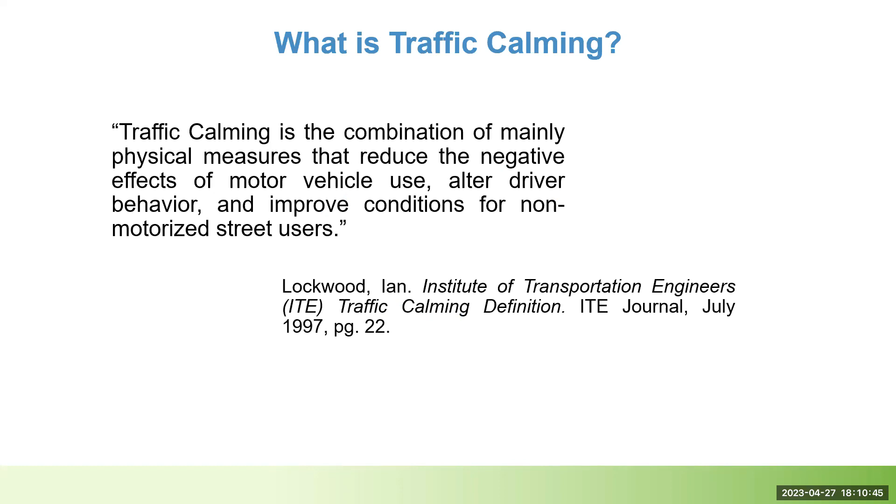The traffic calming program in Ann Arbor is designed to provide residents with a formal process for engaging with the city in a partnership to perform a technical analysis of traffic concerns on local streets and explore potential solutions. It's a 5-step program, and we'll briefly describe each step, but there's a guidebook available online with more detail if you'd like to review anything after this meeting.

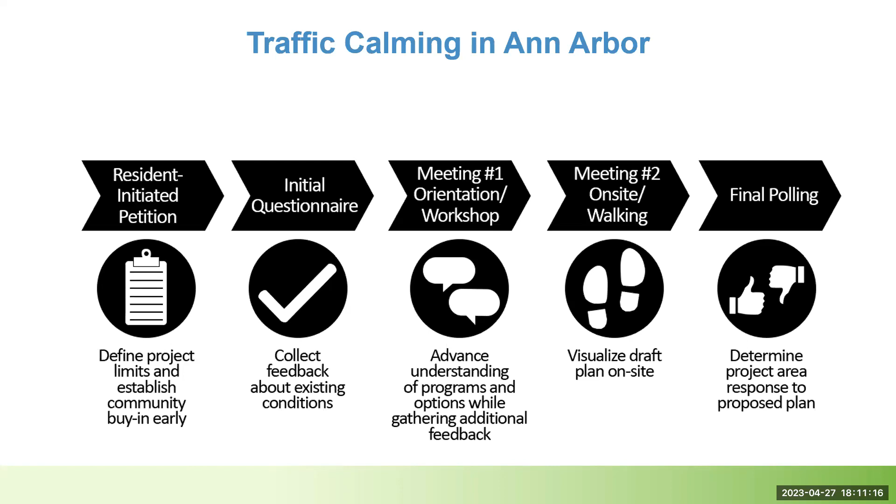The Manchester Road project started with one of your neighbors acting as a petitioner who submitted a request to the traffic calming program for Manchester Road between Buckingham Road and Needham Road. The petitioner gathered signatures from residents who lived in this area.

The requirement for the traffic calming program to accept the request is that at least 50% of the defined project area must support the project, and a preliminary technical study must result in at least 10 points. This project collected signatures from 50% of the addresses, and the preliminary study resulted in 29 points. A breakdown of those points is available on the project website.

At step 2, Wade Trim sent out mailers with an initial questionnaire to all project area residents to gather feedback on specific concerns you may have and what experiences you may have previously had with traffic calming. A detailed summary of the questionnaire results is available on the project website, but the requirement to continue on to step 3 is at least 50% of those who participate in the questionnaire must support the project moving forward. Of the questionnaire responses we received, 73% were in favor.

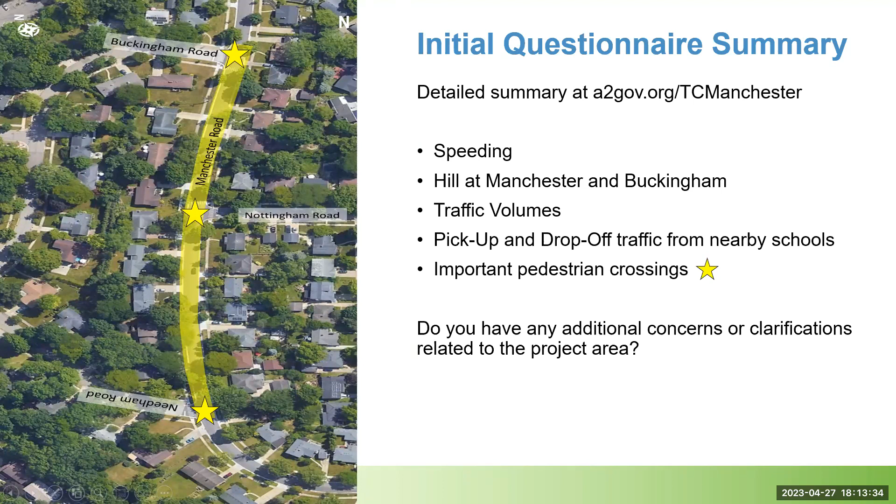Please use the Q&A function or raise your hand if there are any concerns or if there's context we have missed.

Step 3 is where we are today, and where most of our focus will be for the rest of the meeting. Before we present the starter idea, we'll go through an overview of the device toolbox that is described in the program's guidebook.

Before that, we'd like to do a quick poll to see how familiar people may be with the guidebook. The question is: have you reviewed the traffic calming guidebook, specifically the device toolbox found on pages 9 through 12? Yes, I'm all set; or yes, but I would still appreciate a refresher; or no.

Because of the structure of this program, the designs we propose are limited to the device toolbox and guidebook. This means if it's not in the toolbox, it's not an option for this project. Some commonly suggested solutions that are not included in this program are stop signs, cul-de-sac or street closures, police enforcement, new sidewalk installations, and removal of existing devices. Additional information and resources can be found in the guidebook or on the A2Gov website.

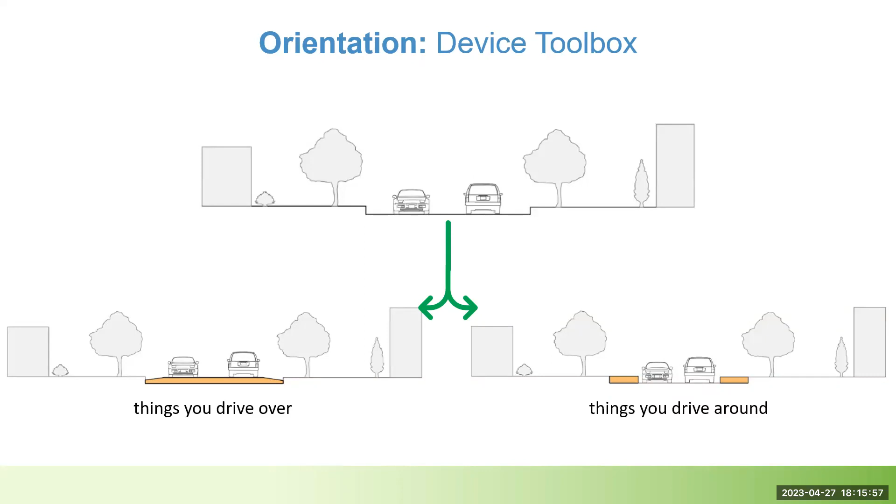Things you drive over are devices that slow traffic by creating discomfort if traveled over at a speed exceeding 25 miles an hour. The device toolbox presents 4 devices that fall under this category: speed humps, speed tables, raised crosswalks, and raised intersections.

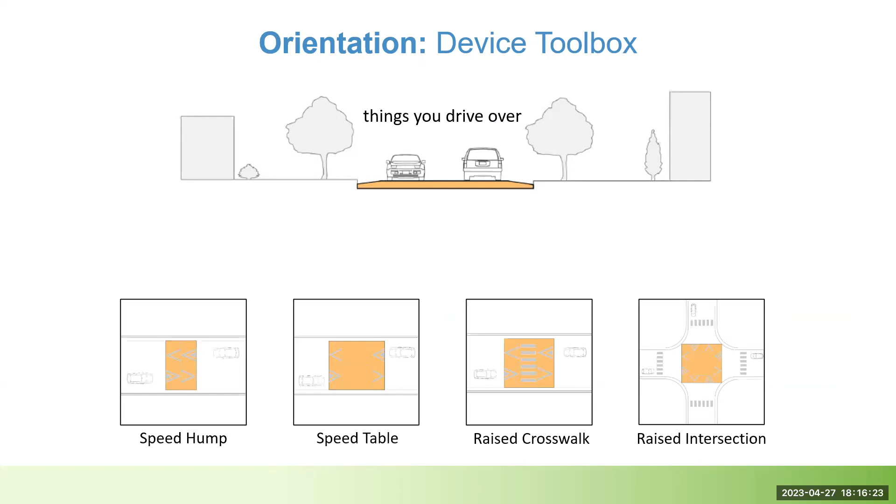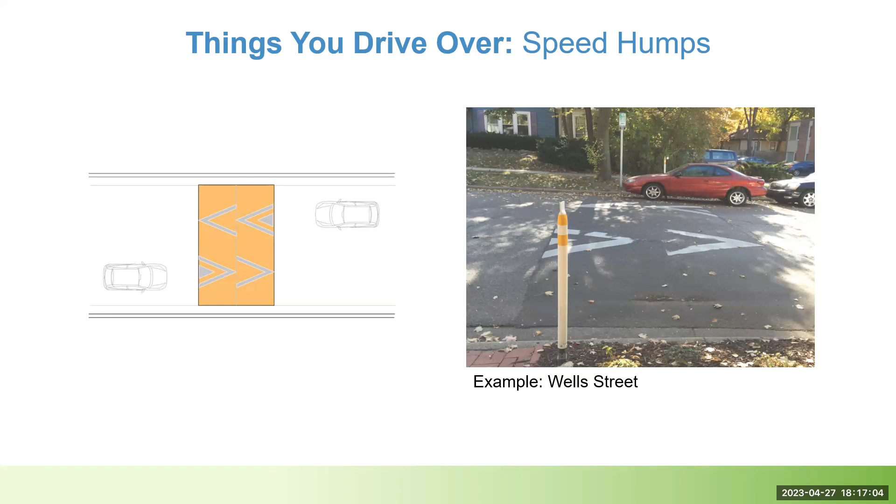A typical speed hump diagram is on the left, with an example from Wells Street shown on the right. Speed humps are typically 12 feet long, 3 inches high, have a parabolic shape, and extend the full width of the street except for the gutter. Studies have found benefits of speed hump treatments may include speed reductions, traffic volume reductions, as well as crash reductions. The height is designed for ease of bike usage and bike safety. If previously permitted, vehicles can park on speed humps, and trash cans can be placed on speed humps if necessary.

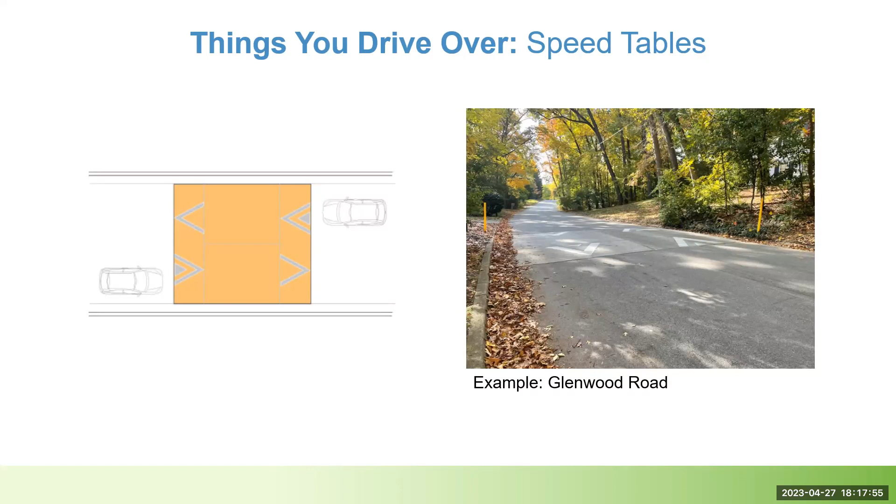This is a speed table. You can see a fully constructed example on Glenwood Road near Washtenaw Avenue. Speed tables are raised devices that extend the full width of the street, except for the gutter. They're typically 22 feet long with tapered edges, a flat 10-foot center platform, and are 3 inches high. Studies have found benefits of speed table treatments may include traffic volume reductions as well as crash reductions. Other notes regarding speed tables: speed reduction is less than the speed hump, and platform width could be customized. The height is designed for ease of bike usage and bike safety. If previously permitted, vehicles can park on speed tables, and trash cans can be placed on speed tables if necessary.

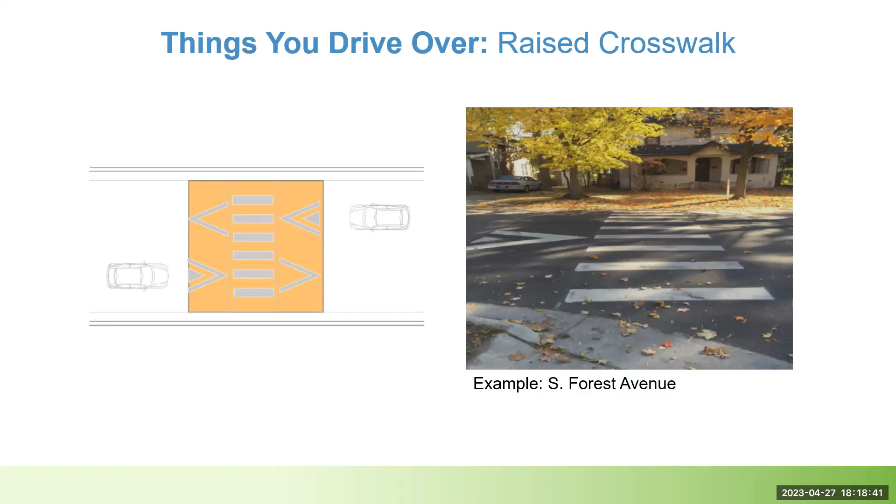This is a raised crosswalk, shown here on Forest Avenue near Woodlawn Avenue. Raised crosswalks are raised devices that extend the full width of the street except for the gutter. They're typically 18 feet long with tapered edges, a flat 6-foot center platform marked with crosswalk striping, and are 3 inches high. Studies of streets with raised crosswalk treatments have shown speed reductions, traffic volume reductions, and crash reductions. They also increase pedestrian visibility, installation must be compliant with ADA, and parking on a crosswalk is illegal, raised or not.

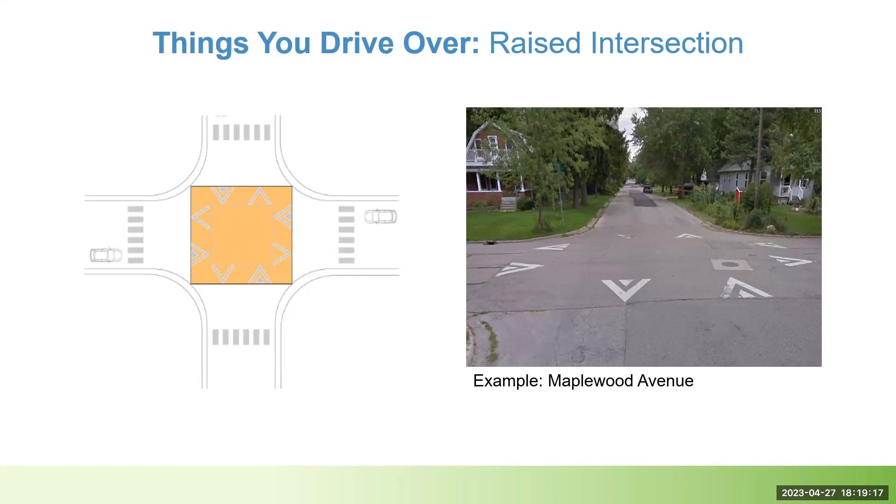And this is a raised intersection, shown here at Maplewood Avenue and Norwood Street. At a raised intersection, each leg of the intersection is ramped to raise the entire intersection 3 inches high. Pedestrian crosswalks may also be marked and raised to the same elevation. Raised intersections are shown to reduce vehicle speed and increase pedestrian visibility. They must be compliant with ADA, and they are designed for bike safety and to have minimal impact to emergency vehicle response time.

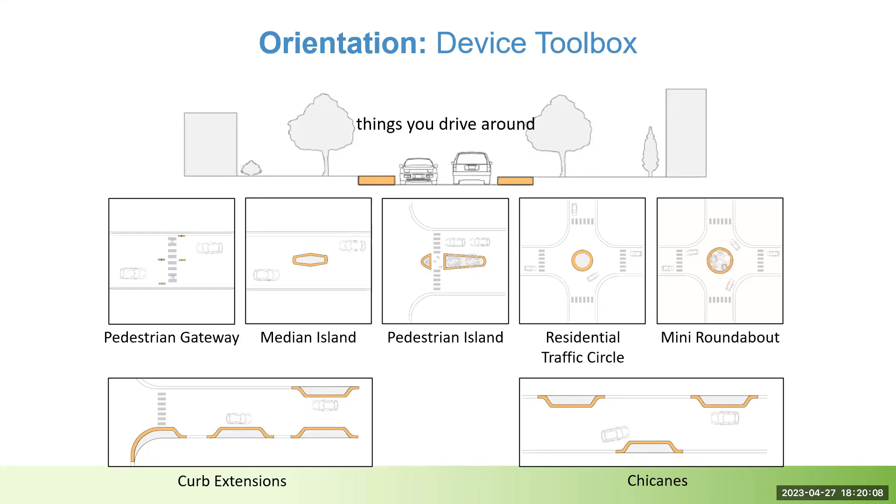The next few slides will describe each of these devices except for the devices marked in red. These devices have been omitted from this project due to street width requirements set by the fire department and conflict with existing traffic controls.

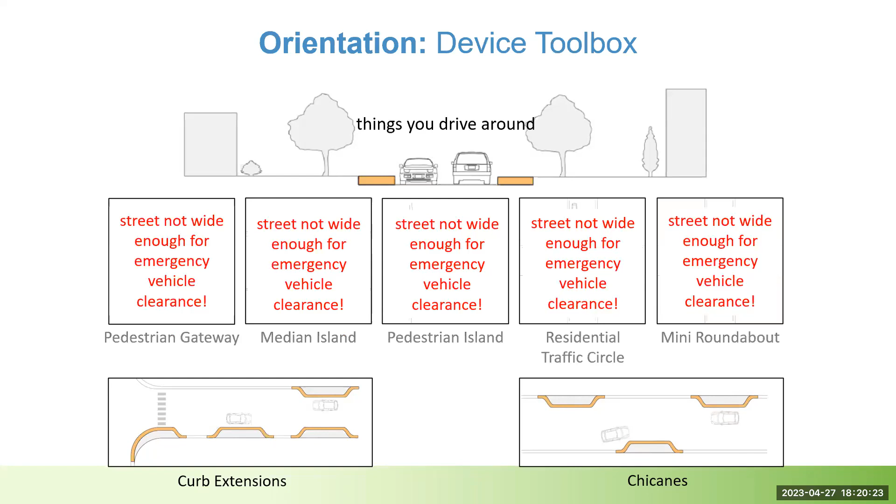2-lane chokers may result in speed reduction and have shown to produce a minor reduction in traffic volume. 1-lane chokers may reduce speed, may result in reduction in traffic volumes, and rely on regulatory signs and driver courtesy. Devices applied to intersection and mid-block locations can shorten pedestrian crossing distance, improve pedestrian visibility, and eliminate illegal parking.

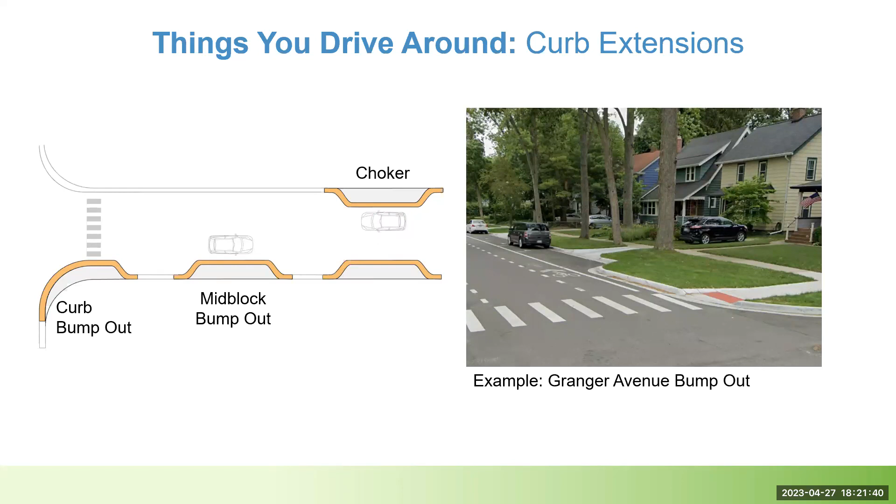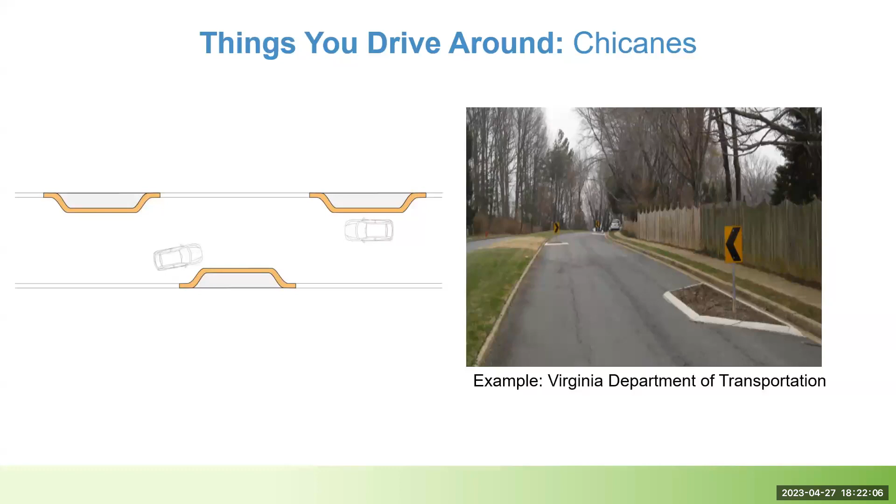Other devices include neighborhood gateway treatments. These are a physical landmark that indicates a change from a higher speed arterial road to a lower speed residential or commercial district. Neighborhood gateway treatments can increase awareness for residential speeds and may require additional right-of-way. In addition, the neighborhood or adjacent property owner would bear landscaping, installation, and maintenance costs.

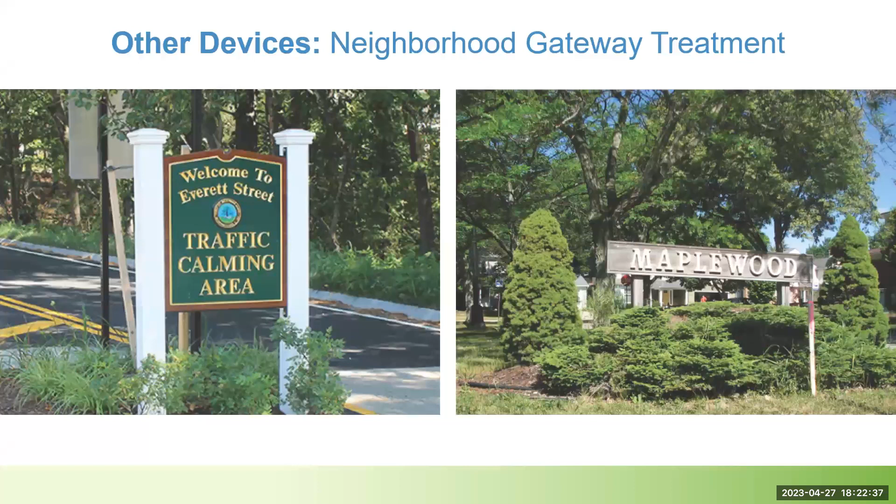Is this a recorded presentation or a meeting? Will the recording be posted? Because the link just showed up on the site 20 minutes ago. Yes, this meeting is being recorded and will be available.

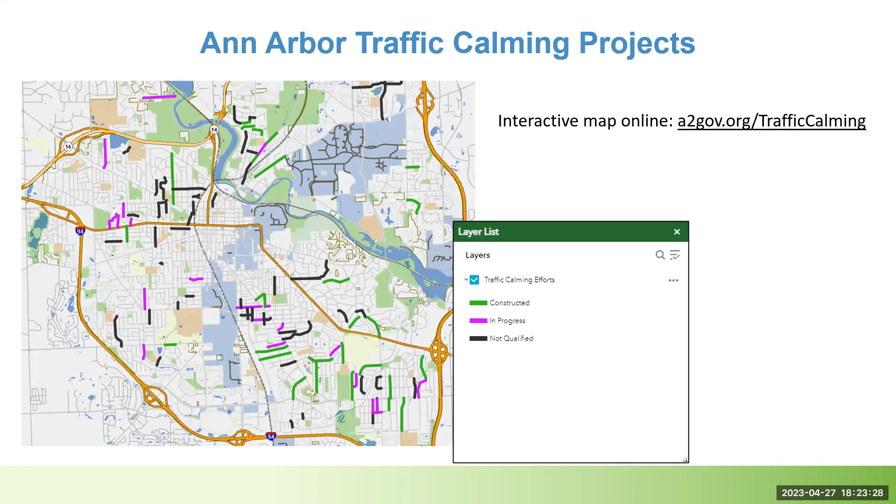Next, we'll present a starter idea, which is a draft plan we've created based on engineering judgment and data collection, including the preliminary traffic study and feedback from the initial questionnaire. There will be opportunity to answer questions on each device and discuss any changes you may want to see, keeping in mind this project is limited to the devices we just reviewed.

Because of the technical difficulties with the website, I'm going to throw a curveball and I apologize to you. Do we have any questions before we get into the feedback exercise from anyone in the meeting right now?

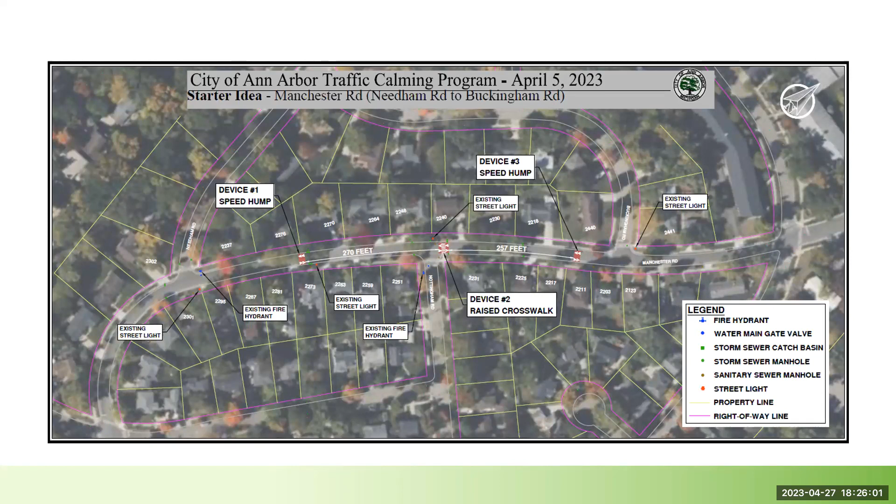Device 1 is a speed hump near 2273 and 2276 Manchester Road. A speed hump was placed here to slow traffic traveling downhill from Buckingham, as well as any traffic that may attempt to speed after the curve leading up to Needham. Speed humps can result in speed reductions, traffic volume reductions, and crash reductions. Some things to keep in mind are that legal on-street parking is still permissible at speed humps, and they are designed to be safe for vehicles and bicyclists to travel over. If there's any questions, please raise your hand or use the Q&A function.

All right, oh, it looks like we have a thumbs up. Thank you.

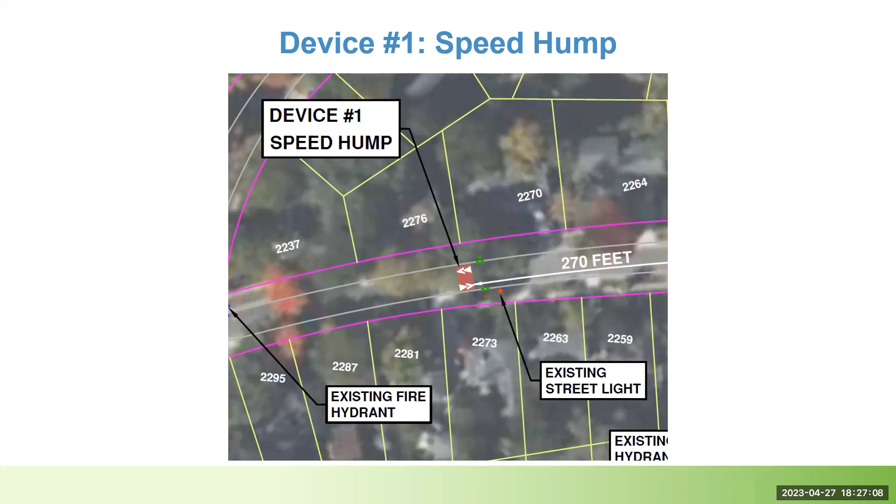Device 2 is a raised crosswalk at the Nottingham Road intersection. Raising the existing crosswalk would increase pedestrian visibility and may provide traffic calming effects similar to a speed hump. Speed reductions, traffic volume reductions, and crash reductions are expected. If there are any questions, please raise your hand or use the Q&A function.

Okay, I'm not seeing any yet.

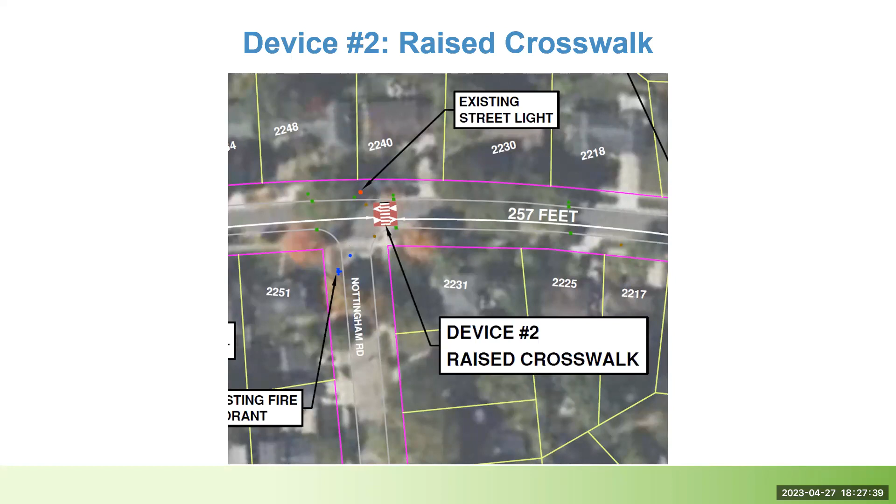Device 3 is a speed hump near 2211 and 2440 Manchester Road. This location was chosen to complement the spacing between devices 1 and 2. The speed hump is also being proposed after the crest of the hill at Buckingham Road to slow downhill traffic. Speed humps can result in speed reductions, traffic volume reductions, and crash reductions. Some things to keep in mind are that legal on-street parking is still permissible at speed humps, and they are designed to be safe for vehicles and bicyclists to travel over. If there are any questions, please raise your hand or use the Q&A function.

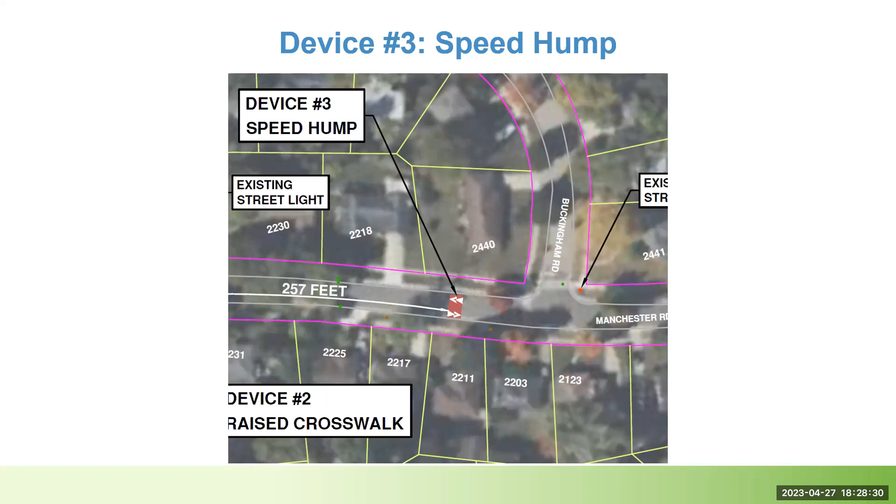Okay, polling. The next few slides will be poll questions for each device.

Do you support device 1, speed hump between Needham and Nottingham Road? Yes, I support this device and live in the project area. Yes, I support this device, but do not live in the project area. No, I do not support this device and live in the project area. Or no, I do not support this device and do not live in the project area.

I think we've gotten everyone's answers.

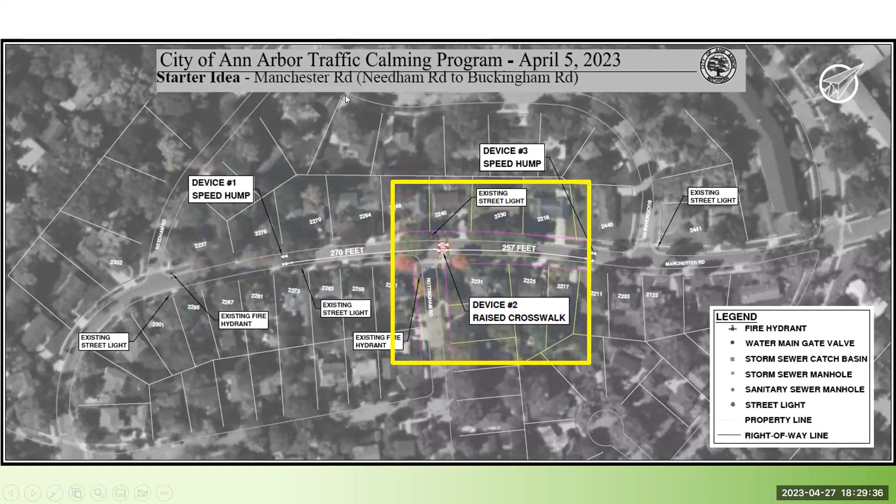Question on device number 2. Raised crosswalk at Manchester Road and Nottingham Road. Do you support this device? Yes, I support this device and live in the project area. Yes, I support this device, but do not live in the project area. No, I do not support this device and live in the project area. No, I do not support this device and do not live in the project area.

Andrew, I don't know if you're there. Are you able to see the... Let's see, I didn't get the poll. Yeah, I will, so we're trying to launch the device 2 poll. Okay, I will, oh. Our polling went down. It's the launch is...

Not working. Okay, all right, so we will not read your answers out loud or publish them for people to read. But could you please put, yes, you're in favor of device 2, in the Q&A box, or no? We see that everyone in the meeting currently lives in the project area. So yes, I support device 2, or no, I do not, because we cannot launch the poll.

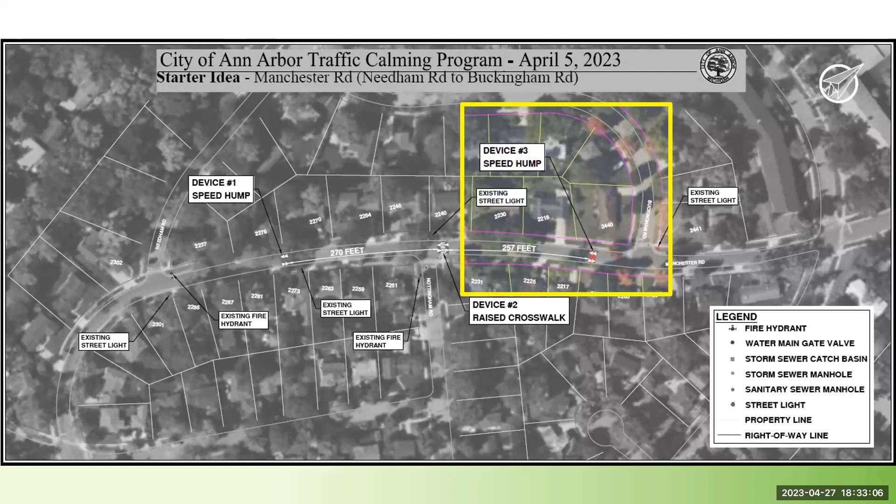We will post today's presentation and recording to the project website by next week. We will also post a summary of today's polling and use the feedback to create a preliminary plan. The next step will be meeting number 2.

Meeting number 2 will consist of 2 parts, a self-guided tour and a Zoom meeting. That Zoom meeting is scheduled for June 22nd. For the self-guided tour, you will receive a mailing packet at least 2 weeks ahead of the Zoom meeting.

The packet will contain device images and descriptions which can be utilized to complete a self-guided tour prior to the meeting. Approximate device locations will be marked in spray paint on the pavement and display the device image and description on a temporary sign near each location. You can also use Google Street View to conduct the self-guided tour.

The meeting number 2 Zoom portion is scheduled for Thursday, June 22nd at 6 p.m. During the meeting, we will present the preliminary plan, answer questions, and poll the audience on each device, similar to the activity we just did.